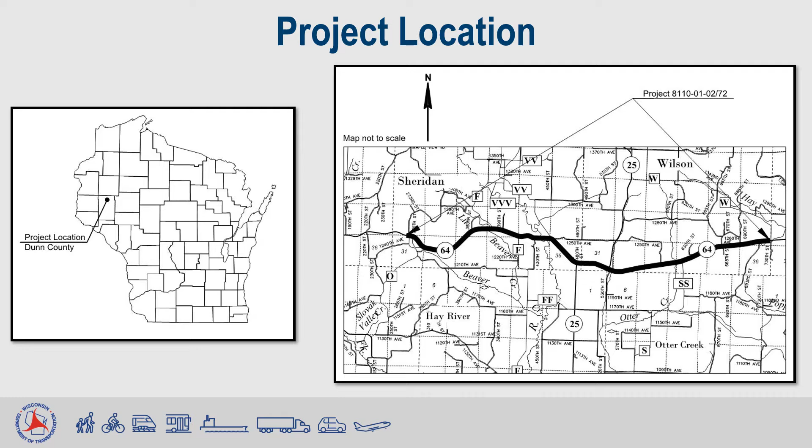Located in northern Dunn County, the proposed Wisconsin Highway 64 project includes a 12.5-mile segment between Connorsville and Bloomer. The project start is approximately 550 feet west of the County O intersection, and the project end is approximately 165 feet west of the north junction of County W.

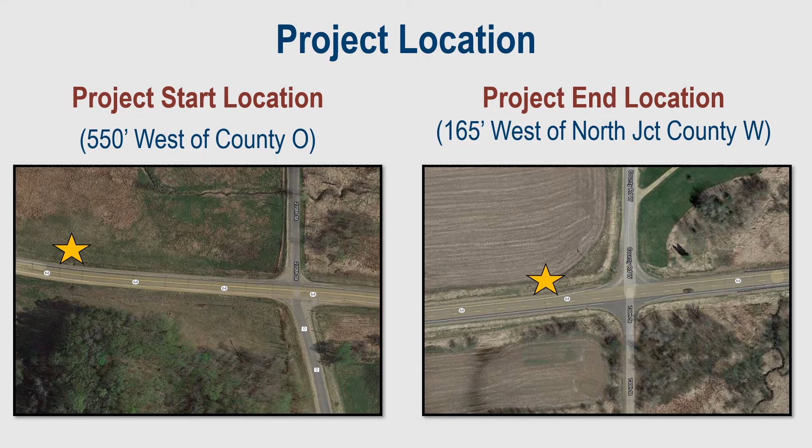The purpose of the project is to address deteriorating structures, the bridge over the Hay River and the twin culverts at Otter Creek, improve drainage at the cross culvert pipes, and improve safety at the roadside barrier systems throughout this stretch of Wisconsin Highway 64. This overall project will extend the service life of the roadway.

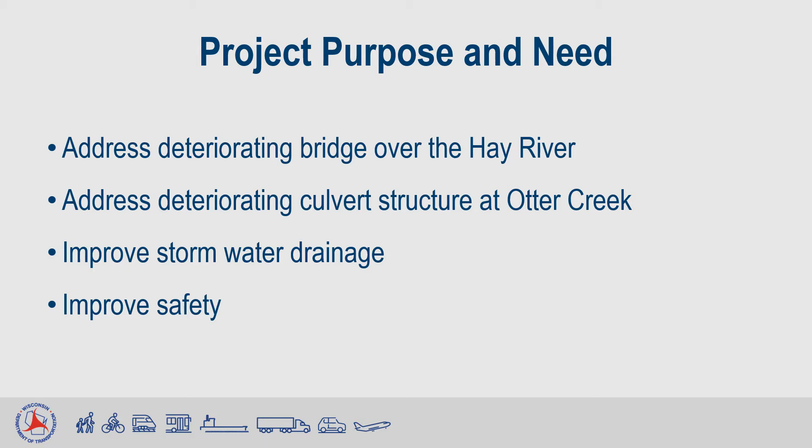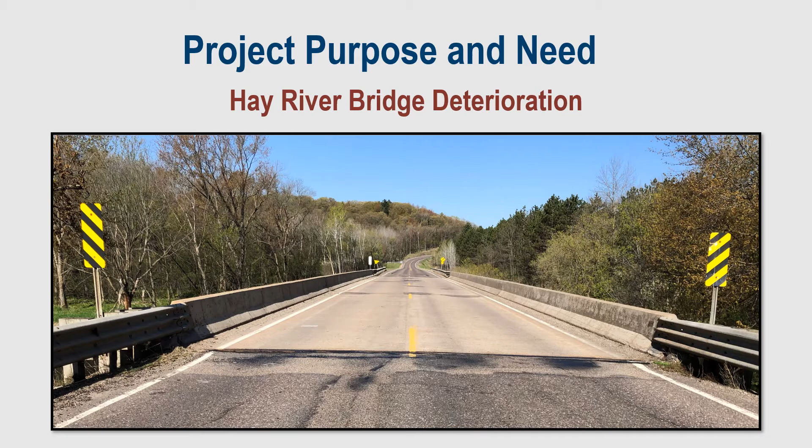The Hay River Bridge structure has several bridge components showing signs of deterioration. These issues, if not addressed, can cause further deterioration of the existing structure, which could eventually lead to reduced load carrying capacity. The Hay River Bridge deck and expansion joints are showing signs of deterioration, and several asphalt patches have been used to repair them. The abutments and piers below the deck are also experiencing deterioration from concrete spalling from their surfaces. Repairing the different areas of deterioration will extend the service life of the bridge.

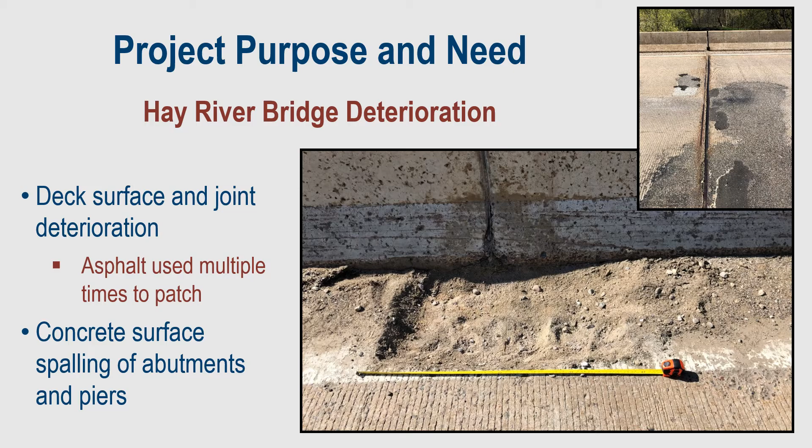The existing twin culvert structure at Otter Creek is nearing the end of its useful life and showing signs of deterioration, including severe corrosion with section loss of the steel pipes, heaved flooring, cracking of the end wall concrete, and debris at the end of the culvert pipes. Although the structure is considered in fair condition, the deterioration will continue to reduce the structural integrity of the pipes, requiring eventual replacement.

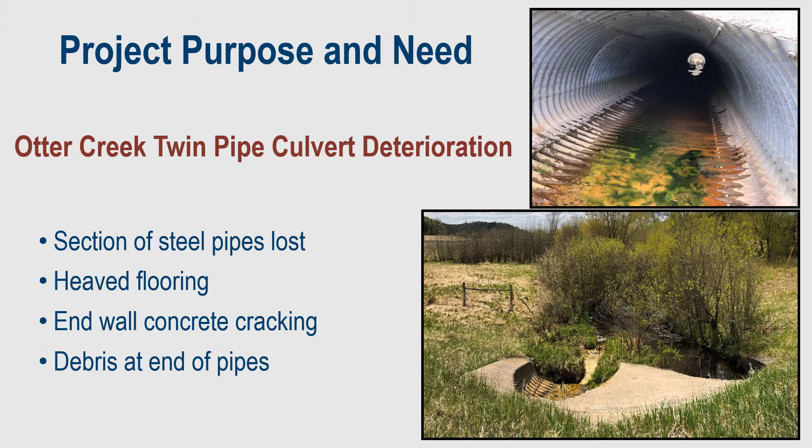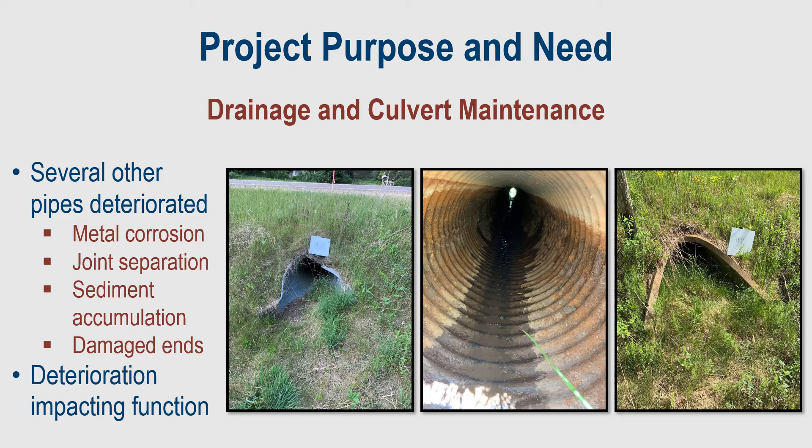Several culvert pipes under Wisconsin Highway 64 also are showing signs of deterioration from experiencing metal corrosion, joint separation, sediment accumulation, and damaged end sections. The deteriorated pipes are not performing as intended, requiring repair or replacement to improve the drainage under the state highway. The existing guardrail system protecting the public from roadside hazards has damaged components and does not meet modern standards for roadside barrier systems. In addition, erosion is occurring behind some of the guardrail.

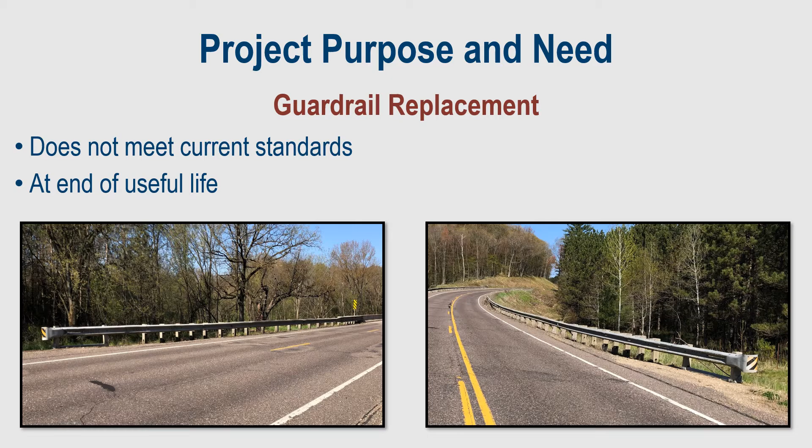Based on its most recent inspection, the Hay River Bridge overall is in satisfactory condition. Because of this, rehabilitation of the structure, not full replacement, is planned. To rehabilitate the Hay River Bridge, the existing deck will be overlaid with concrete and the deck expansion joints will be replaced. The spalling on the abutments and piers will also be repaired. Rehabilitating these different components of the structure will extend the service life of the Hay River Bridge, providing the public a safe route along Wisconsin Highway 64 to travel and haul goods.

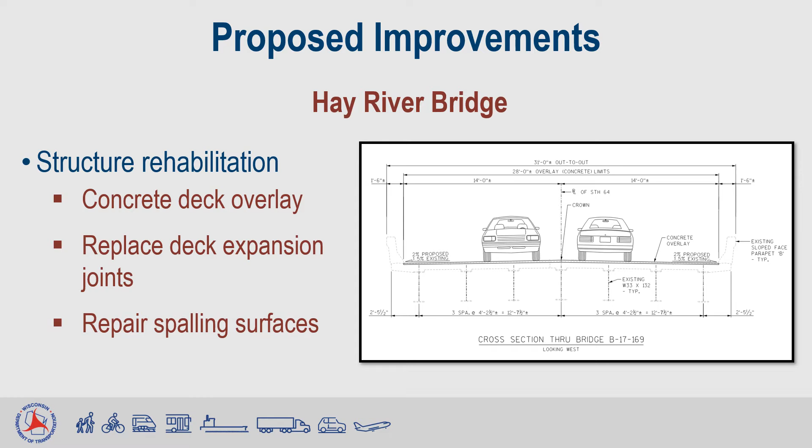The current twin steel pipes that carry Otter Creek under Wisconsin Highway 64 are nearing the ends of their useful lives. The existing pipes with concrete end walls will be replaced with a concrete twin cell box culvert. The proposed improvements will include installing riprap around the new end walls and removing debris at the end of the culvert ends.

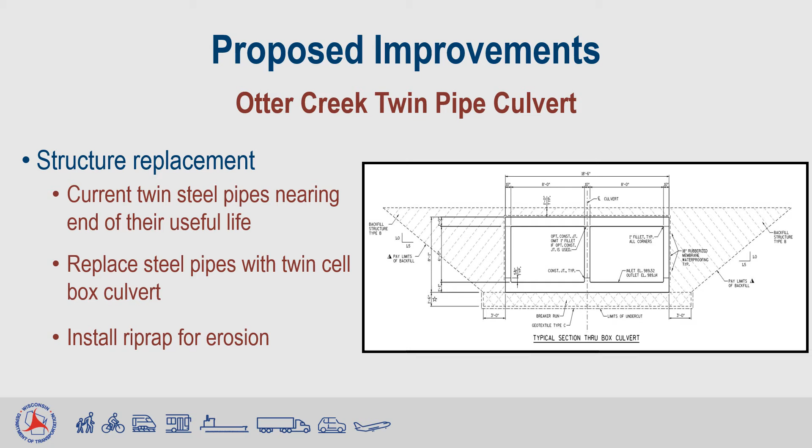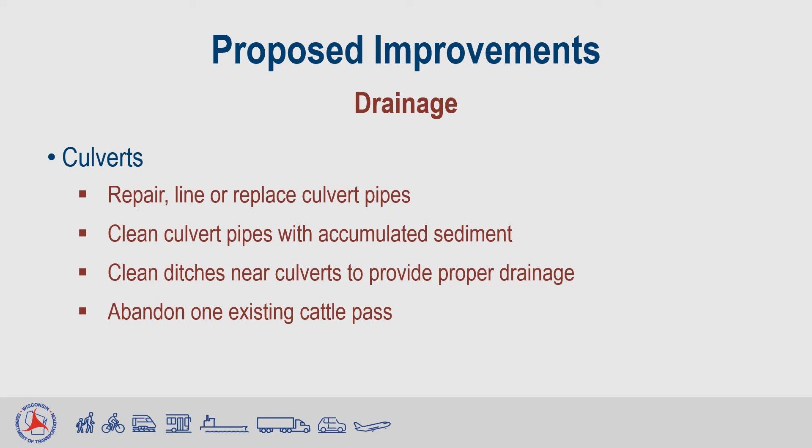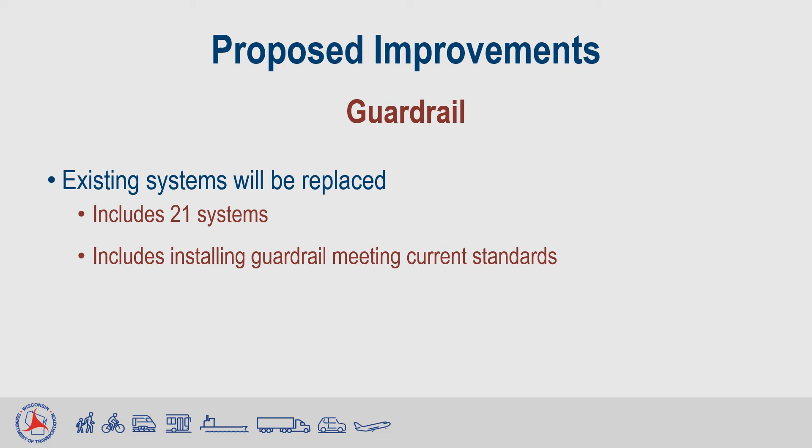Within the Wisconsin Highway 64 project limits, there are several culvert pipes that will be cleaned, repaired, lined, or replaced as needed to improve drainage. Cleaning culvert pipes will include removing accumulated sediment. Overgrown ditches near the culvert ends will also be cleaned to improve drainage toward the culvert pipes under the highway. In addition, one existing cattle pass is proposed to be abandoned. Additionally, part of the proposed improvements include replacing 21 guardrail installations along Wisconsin Highway 64 with new systems that meet current standards and have energy-absorbing end terminals.

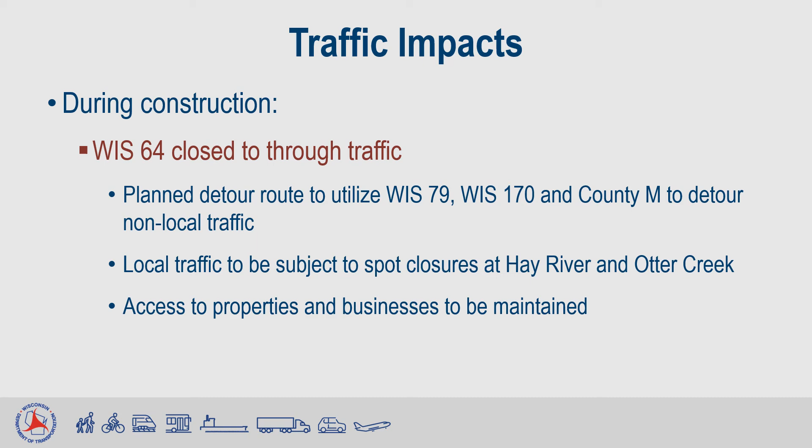Construction is anticipated to begin in the spring of 2025. During construction, Wisconsin Highway 64 will be closed to through traffic, and a detour will be utilized during construction. The planned detour route will utilize Wisconsin Highway 79, Wisconsin Highway 170, and County M for non-local traffic. Local traffic, including emergency services, will be subject to spot closures at Hay River and Otter Creek during construction of those structures. Other local routes will be available to local traffic. Access to properties and businesses will be maintained throughout construction, except for short duration closures when work is performed at driveways and entrance locations. Coordination will be completed with property owners.

The detour route for the through traffic is approximately 36 miles long and passes through Boyceville, Wheeler, and Colfax before reconnecting with Wisconsin Highway 64. Construction signing will be provided to direct traffic along the entire detour.

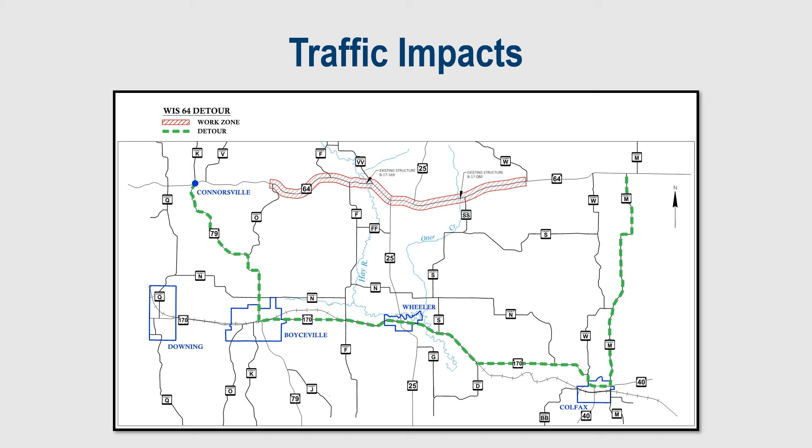Preliminary design began this summer. The preliminary design is to be completed this winter, and the environmental document is to be completed in February of 2022. The plans for the project are currently scheduled to be finalized by May of 2024, and construction is currently scheduled for the 2025 construction season.

If you have any comments, questions, or concerns about this project, please send an email, call, or send a letter to WisDOT Project Manager Jessica Bowker. She is accepting comments through December 31st. Thank you for taking your time to watch this presentation.